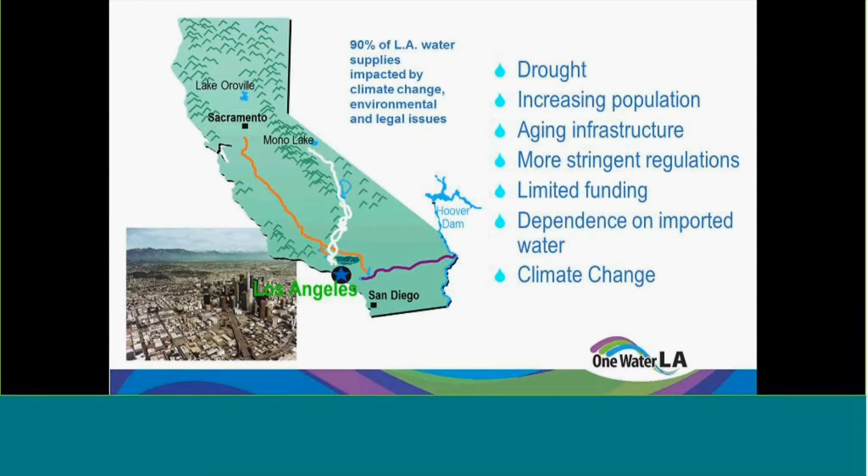Los Angeles, like many cities across the country, is facing the same challenges. In some places, there's too much water. In some places, too little water. But we have issues that we have to manage: growing population in our urban cities, aging infrastructure, pollution of waterways, shortage of open space, shortage in water supplies, and a changing climate. So our future depends on dealing with these issues, adopting an ethic of sustainability, and changing our relationship with water.

To address these challenges and make our cities sustainable and a healthy place for us to live, we need what I call the 3 I's: integration, innovation, and inclusion. We need bold integrated solutions that provide multi-benefits. We need to leverage our resources to improve water quality, capture and reuse more local water, conserve water, maximize the use of recycled water, capture nutrients, generate green energy, and many more.

Our Mayor Garcetti developed and adopted a sustainability plan and executive order, which you see him signing here, setting an aggressive goal for the city to become resilient and sustainable. The goal is that by 2035, 50% of the water we use in Los Angeles has to be locally sourced. By comparison, we currently import 85% of the water into Los Angeles. We need to focus our efforts on meeting the mayor's goal of 50%.

To address that, we need to work together. We have to look at water as one water. It doesn't matter where it's coming from, whether it's recycled water, groundwater, or stormwater. For us to meet that goal, we have to collaborate, and that's really what we have done under the One Water LA plan. We are moving forward on many fronts to make Los Angeles sustainable and meet the mayor's goal. We are using an integrated approach to manage water regardless of its source.

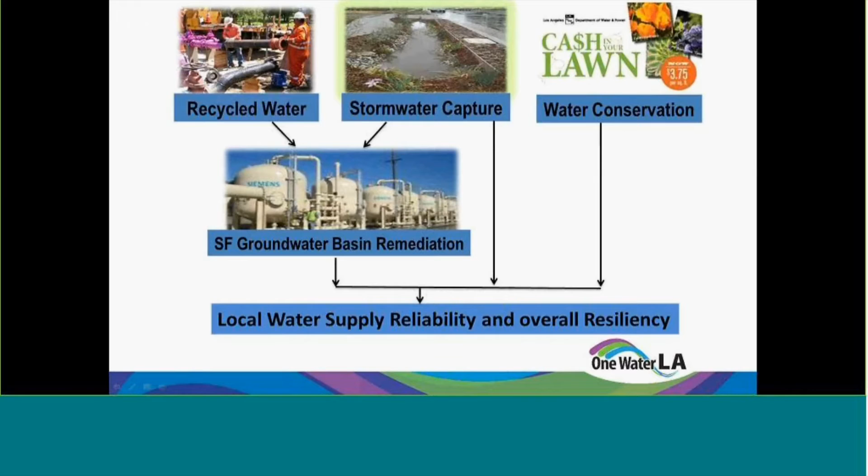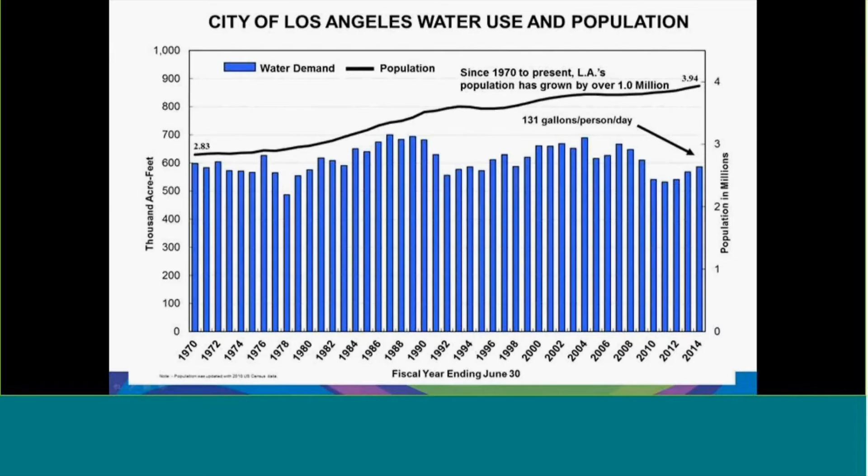Los Angeles, we've done a great job over the many years. We have done a lot. Our water consumption today in Los Angeles is the same as it was 40 years ago, with 1 million more people, but more needs to be done for us to be sustainable. So we're working very hard on increasing our water reuse. And the way we're going to be doing it is through connecting the dots.

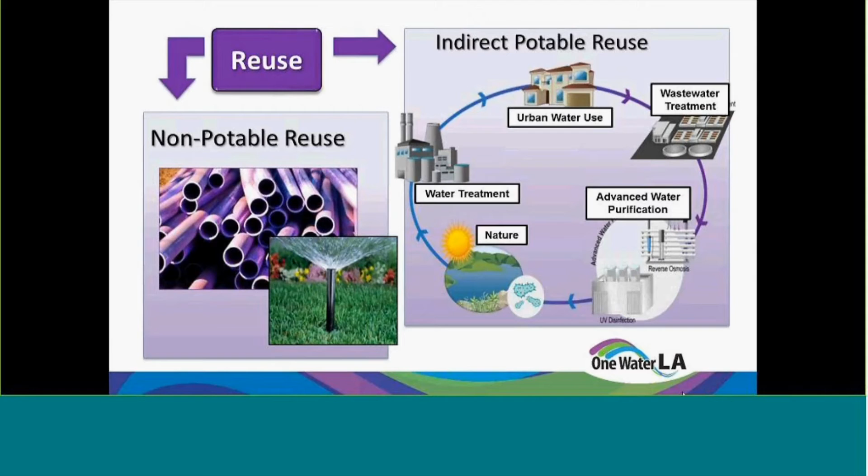And what I call the dots is the most difficult thing for anyone to maximize reuse is to be able to have the supply closer to the demand. And that's something that we are dealing with in Los Angeles, because of the topography of the city. The wastewater flow goes all the way down to the ocean, so it's very hard to bring the flow back all the way to the demand in the upper parts of the city. So we need to work really hard on how we work that out and how we address this.

In the area by the harbor, San Pedro, we are actually expanding our advanced water purification plant, which should be done early next year, and that should basically make the entire plant's highly purified water available to be reused. And we're dealing with a lot of other areas here to maximize and partner with our partner communities to distribute water, and we're building some satellite plants in different areas that require demand.

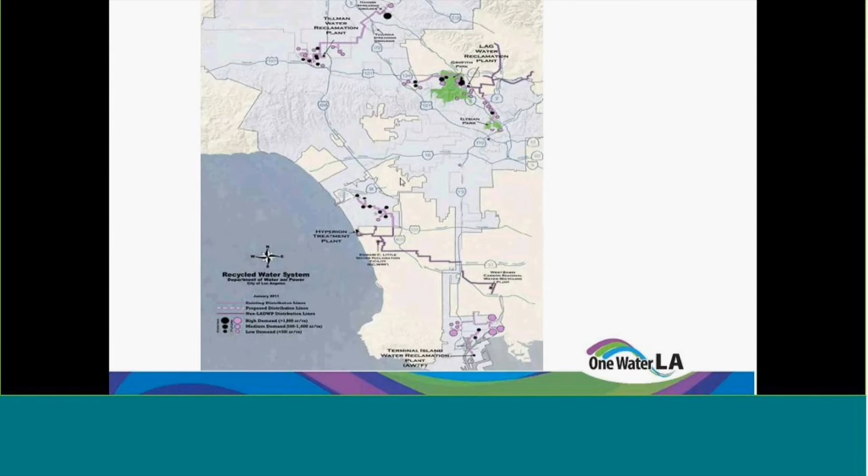But really the biggest bang we see is if you can treat the water and put it in the ground for groundwater recharge. That's really what we see as the best potential for all of us. And then we know we're all working towards, at some point, direct potable or a quicker recovery of that water, but the regulations are being done in California. Hopefully that will be soon.

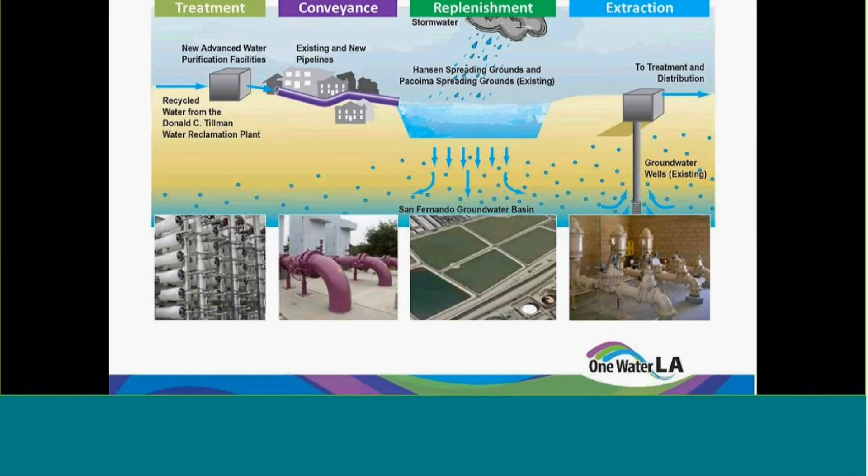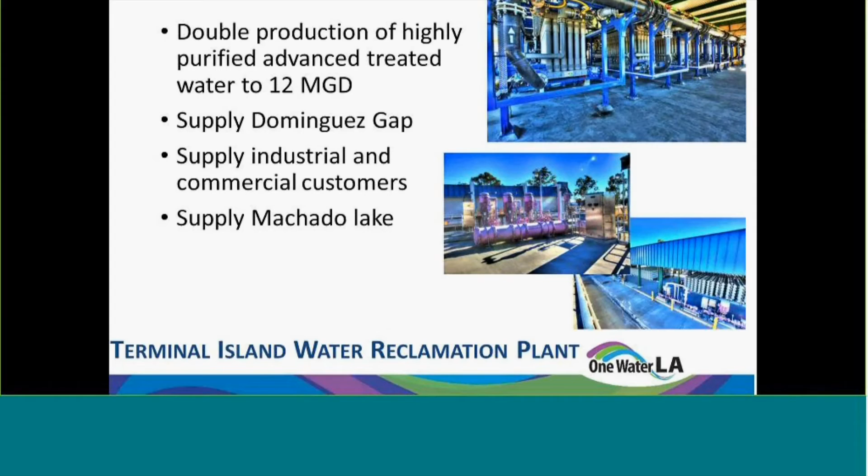Just to walk you through some of the treatment plants we're doing right now. This is the Terminal Island treatment plant, which is the one by the Port of Los Angeles. We're doubling the production of purified advanced treated water to 12 MGD that would allow for supply to the Dominguez Gap, that is a seawater barrier. We're supplying industrial and commercial customers, and also we're supplying water to Machado Lake, a lake that was using potable water for makeup water. Now we're going to use advanced purified water for addressing the issue.

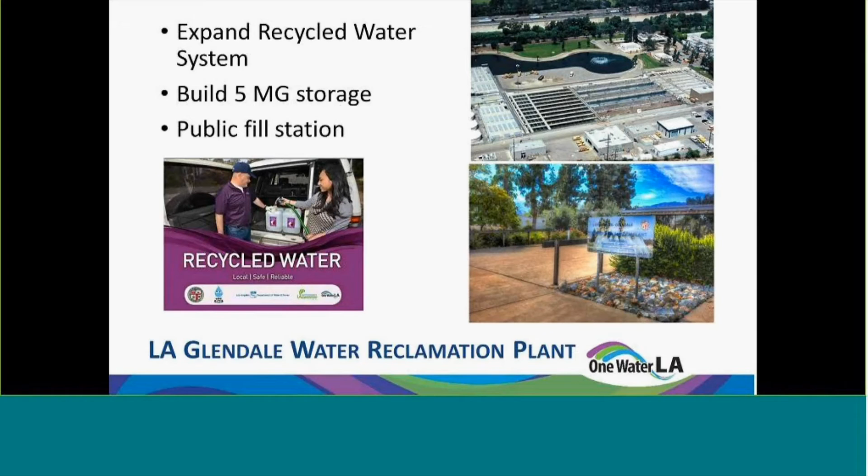The LA Glendale plant, that's the one I showed you where it had the storage being added. We're expanding the distribution system, but also building a 5 million gallon equalization storage system. But also we have fill stations now for the public to come in and use recycled water and fill up to 300 gallons at the plant and also at the LA Zoo, which is next to the water reclamation plant.

The Tillman plant, this is the one in the San Fernando Valley. That's where the richest and the most productive aquifer we have is. We're expanding the recycled water system similarly, but with water conservation, it's a great thing, but what we're seeing is the wastewater flow is going down. That means the recycled water is going down, because it's wastewater being treated. And we have a lot more demand in this area for groundwater recharge than we have supply.

So we had to rethink through the One Water planning. We're actually rethinking how we can get more wastewater to the treatment plant here to make up for the water that's being conserved. And actually we're going to be building sewers as part of this One Water plan that would reverse the flow of some of the sewers that used to go downstream in the system to the Hyperion Water Reclamation Plant by the airport. We're going to bring it back towards this facility to increase the wastewater flow reaching the facility so we can get more recycled water.

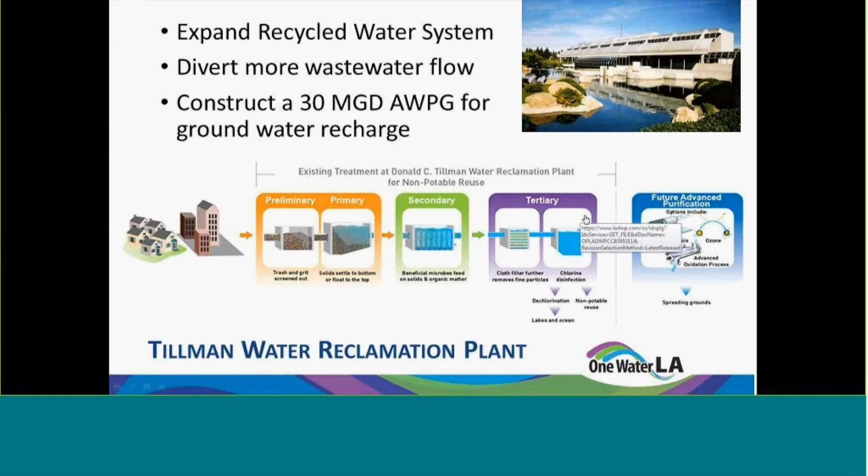So that's kind of the integrated approach that we are talking about that really makes a lot of sense. And in Hyperion, our biggest, this is the area that basically is by the airport and by the ocean. And the most difficult issue we have here is when you get the water at this location, it's very hard to bring it back to the users.

So we're working with our partners along the area here in the West Basin. So we have to have regional solutions to expand the water that we get to West Basin by 70 million gallons and build an MBR facility at our location. We're partnering with the airport to provide them recycled water for the airport expansion and the airport water use. And also upstream, as I mentioned, we are taking more flow into the upstream water reclamation plants to augment their flow to have more recycled water.

And in some areas in the city, actually, we are looking at a satellite plant. This is an area by UCLA called Rancho Park. We are looking at stormwater capture along with mining of the sewer, building a satellite plant to treat stormwater and wastewater to a level to distribute that water as recycled water to supply the golf courses and the parks in the area. Those golf courses and parks are the highest users of potable water at this point, and also to partner with UCLA and provide recycled water to UCLA and the customers in the area. So that's a thinking that we are working very hard on.

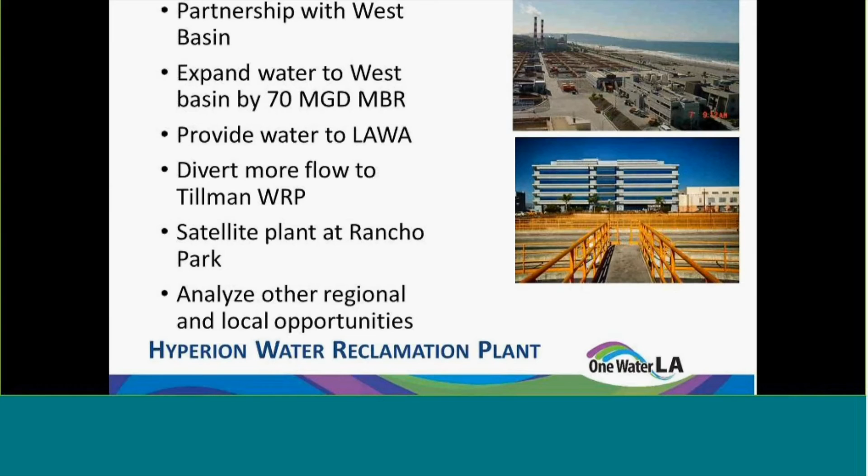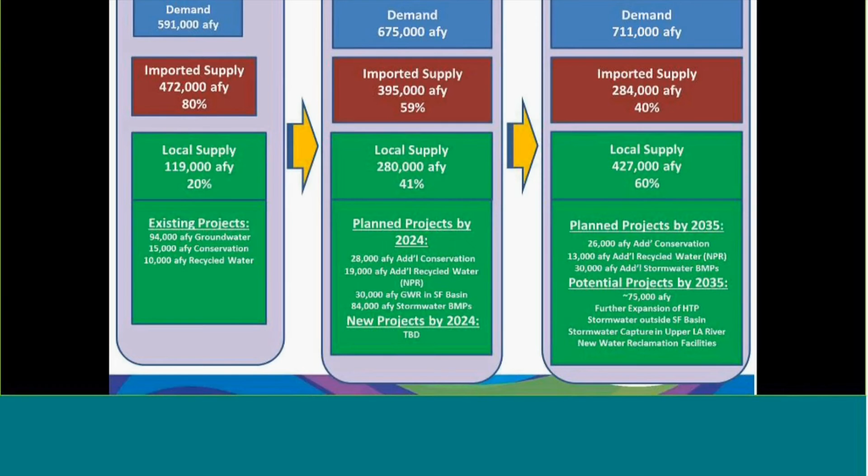And you can see our goal is to take Los Angeles from right now about 80% imported supply to making it 60% local supply, and maybe meeting the mayor's goal of 50%, by building more water conservation, increasing the recycled water, doing groundwater recharge, and also stormwater capture. Stormwater capture is a critical element of our water formula and what we're trying to do.

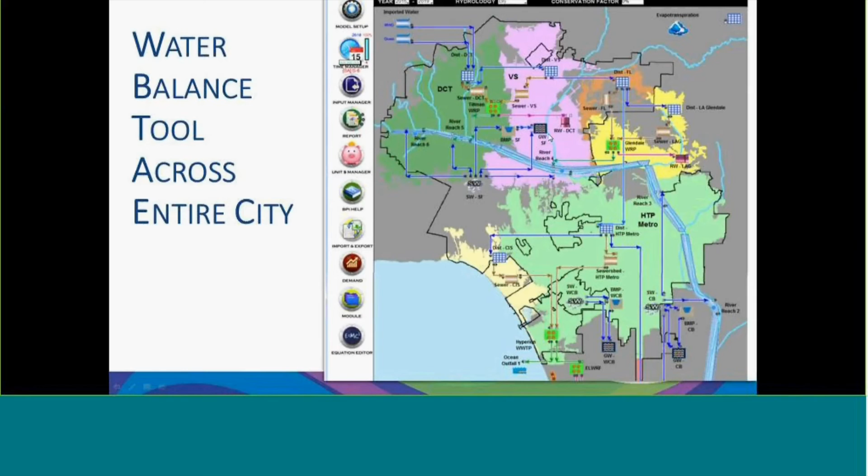This is a model that we're doing as part of the One Water Plan. This is a very interactive model. We have been working with our partners, the consultants and the stakeholders on really managing the distribution of water and how water is managed. So everything we do, whether it's stormwater being put into the sewer system or recycled water being generated, where the demand is and where the water is coming from, all this is now in a model that we are using to manage the system in a better way.

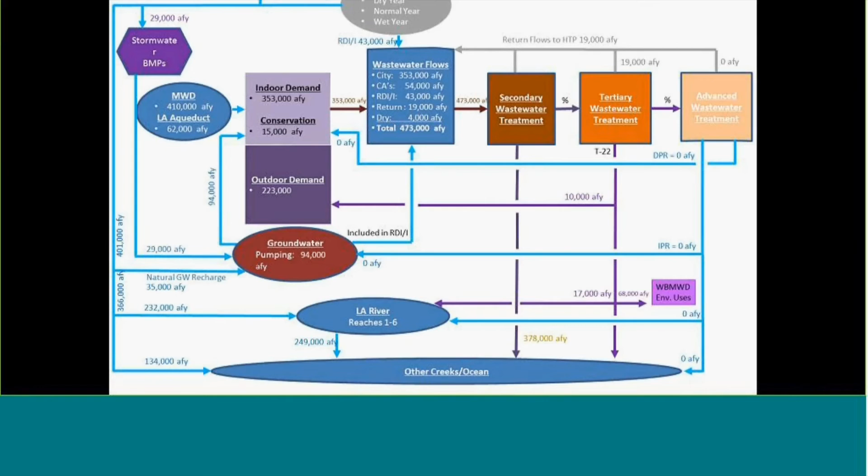And this is a schematic. I can't be an engineer without showing you some complex graphic here, so I have to really throw that in just to validate that I'm still an engineer at heart. So I want to just show this is the very basis of the model, a very interactive model.

And this is the one I was talking about, the innovative discussion. This is really how creative we are being. This is the area where we are changing the flow and bringing more wastewater across the city back to the treatment plant to increase the amount of water that we are generating here. In this area we were building a sewer, and we stopped the sewer construction that was going to take the flow all the way down to Hyperion, and we are now building a storage facility here to maximize recycled water. And this is the area that I talked about, building a satellite plant and distributing the water to UCLA and to the neighbors in the area of Rancho Park.

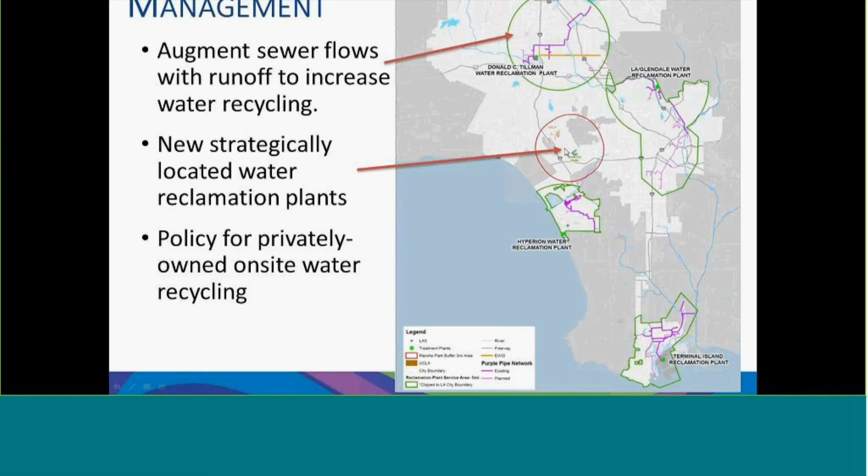Stormwater is a critical element for us. It's a critical component. Every time it rains, there's billions of gallons that get washed to the ocean, and we need to transform that relationship. And the great thing about stormwater is it's really changing the relationship of people with water and our relationship with the community. People are excited now about water. All those stormwater green infrastructure projects that are treating stormwater are being seen as a huge asset to the community. It's making the community a better place to live.

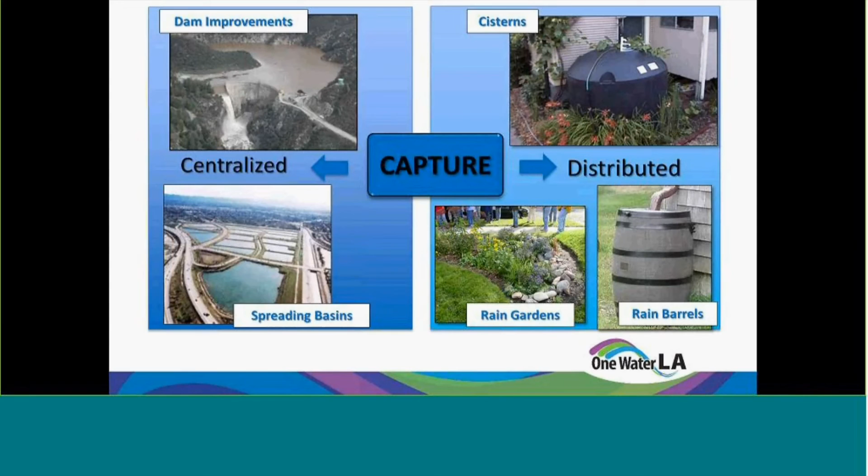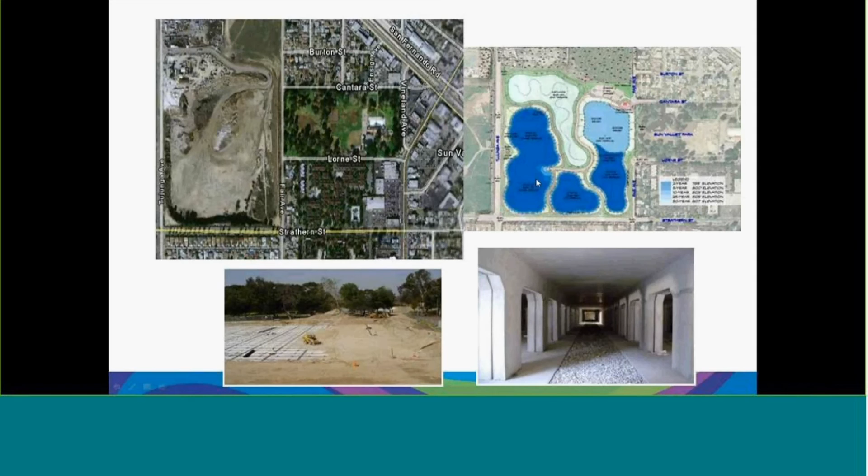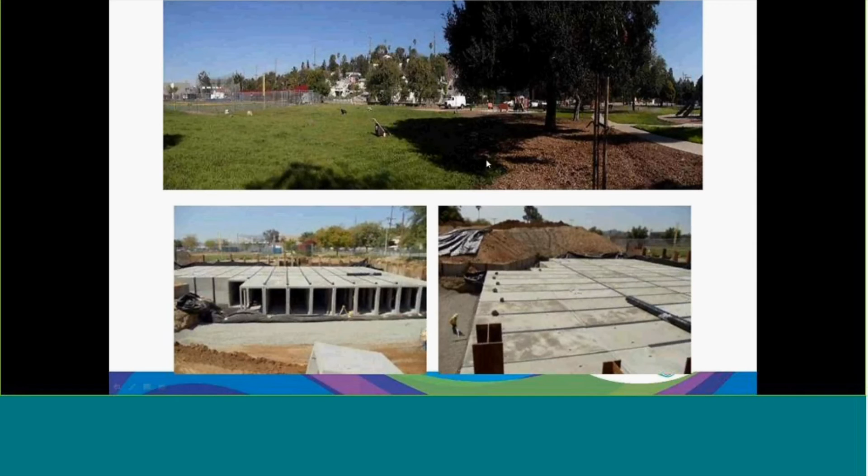This is another project where we're capturing stormwater and treating it underground for a baseball field in Highland Park in the city, and we built a 1 million gallon cistern underground and an infiltration gallery, and the community got a new baseball field above it.

Really, at the end of the day, we need to break the silos. It's no longer just being able to go build a treatment system. You need to be able to figure out how you're going to relate to your neighbors, because most solutions have to be regional solutions, but also how you're going to be able to partner. For example, we have to build a facility for a satellite treatment now at a golf course that's owned by our Recreation and Parks, and we need to coordinate with them. They're going to get the water, but at the same time, we're using the space that they are offering.

That partnership is critical, and that's what we are doing under the mayor's call to build an integrated water management effort. We have a water cabinet that meets monthly under the mayor's leadership, and we are coming together, all of us, looking at improving and building green infrastructure across the city, and we built a lot of these projects.

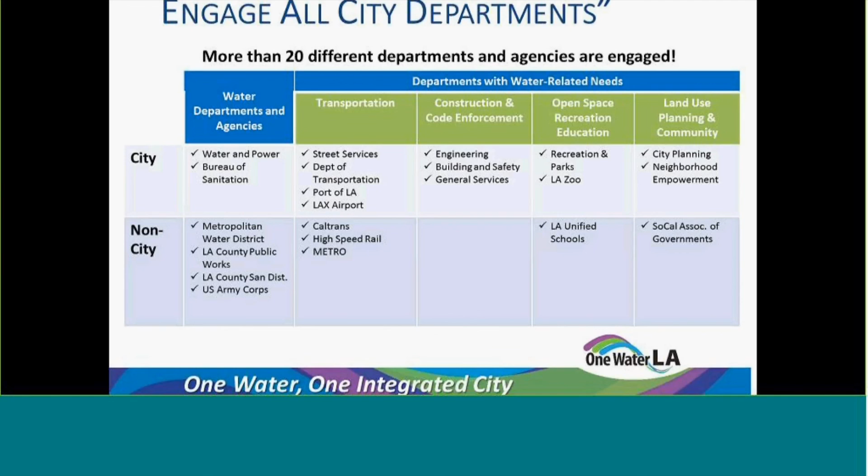Last Saturday I was at a ribbon cutting for a green alley in South Los Angeles that really converted a blighted alley into a stormwater capture infiltration alley with a beautiful passage we call the Greenway that's connecting people, and the community just loves that, and that's changing the excitement, the relationship of people with water.

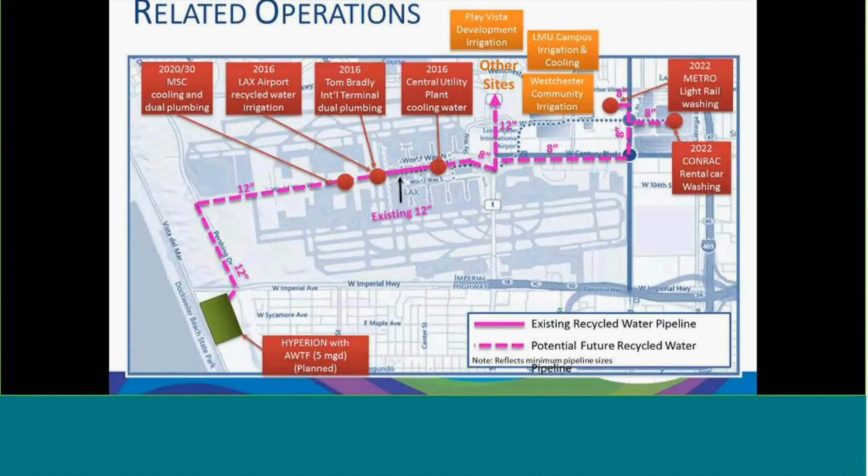And this is the airport. The airport is expanding their facilities, but we have to come in and work with the airport to ensure that we are collaborating together on providing them the recycled water to support the airport expansion. At the same time, we are partnering with the airport to capture runoff from the airport, to treat it and infiltrate that to provide augmentation of our groundwater. So it's a win-win in every way.

But at the end of the day, with all of this, we need to engage the public early in the stage. And that's something that we're very proud of in Los Angeles, that we have done that from the beginning, engaging the community, the stakeholders, the partners that we have across the city in this effort. It's critical to get the support early in the stage. People have to really engage and provide us the input early, and it's essential to the success of any expansion of a facility, any investment.

At the end of the day, people have to pay for this. And if they don't see the value and the benefit, and they're not engaged in the discussion... it's critical that they are engaged at every level. We open our doors. We have open houses, open facilities that people can come and see. We have an environmental learning center now at our treatment plant that over 20,000 kids come and visit to learn about water and water treatment. And we have partnerships across the city for doing that.

And the stakeholder process that's going on right now that I'm missing: today we have a One Water LA stakeholder meeting that's happening to talk about the investments, the roadmap, and the projects we are doing. To me, at the end of the day, it's all about integration, innovation, and inclusion.